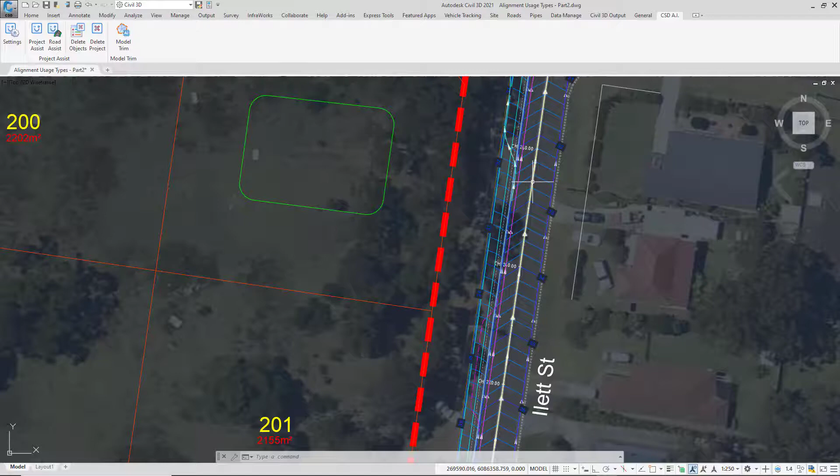So in part one, we used Project Assist to help us build the framework of Ilett Street. This was to create a road string for the main road, followed by road edge connection or string controls for the left edge and the right edge, and then an additional saw cut control. In this particular video, we're going to be creating road 1.

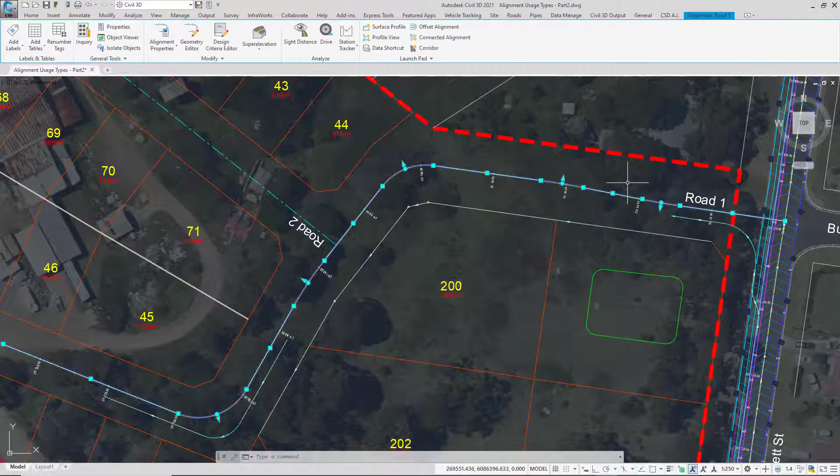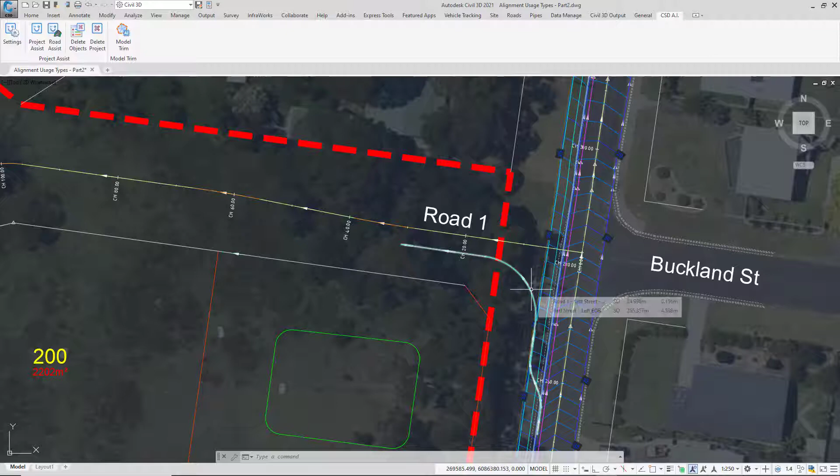And road 1, as you can see, has an alignment which will represent the crown, and the extent of it is shown there. We also have an intersection which will be created for us, and on the south side we have the custom curb return alignment being applied, so we'll be looking at that very shortly.

Further along road 1, we have a small amount of widening on this particular corner, and to assist us with that we have positioned an alignment, so the extent of the 3% crossfall will be projected out onto this particular alignment. Lastly, we've then got an alignment for the boundary. Now we can use this a couple of ways, but we can either have a boundary code applied on this alignment, or we can restrict the batter of our design to this particular alignment. So we'll have a look at that.

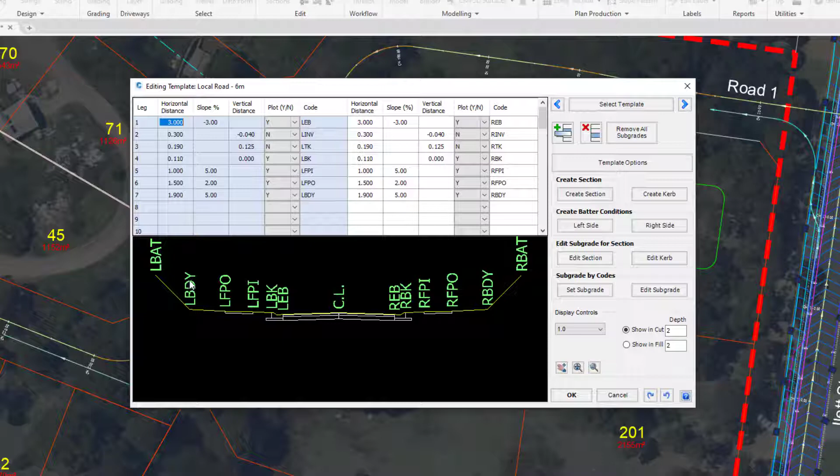Before we do that, let's have a look at the template. So this is the template that's going to be applied. Fairly straightforward. The boundary code, the BDY code, is actually applied in the settings, so the software will look for the BDY code and utilize that in association with the alignment that we have positioned in the drawing. Let's run Project Assist.

So the AI goes through and has a look at the alignment naming, and then tries to determine what each alignment usage type should be. So yes, road 1 is going to become a road string. It's also very important because two road strings, when they connect, will form an intersection. So really road 1 can only ever be a road string. The road 1 batter extents alignment that we reviewed earlier is going to have a boundary line type assigned to it. So this means, as you'll see very shortly, we can determine a couple of things with that.

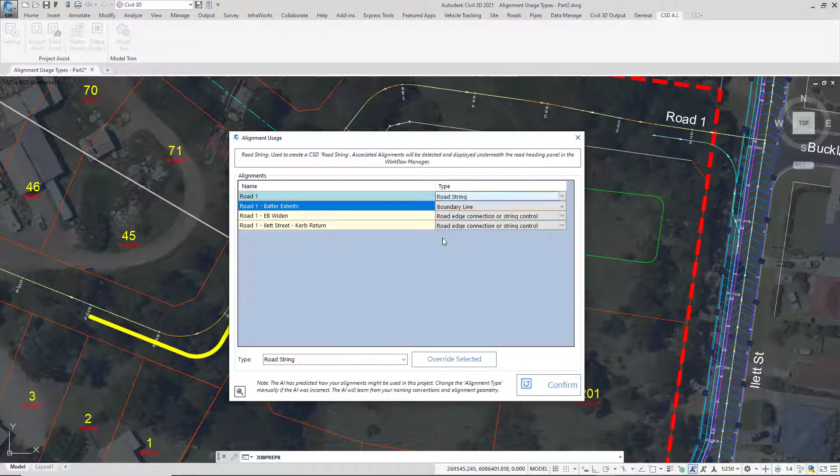If you're creating any kind of widening or edge control, then by default you would always pick road edge connection or string control. If your alignment represents a network string, i.e. a curb return or a cul-de-sac, you will always pick road edge connection or string control, because it's actually doing two things. It's controlling the edge of bitumen, but it's also becoming its own string control in its own right. Let's click on confirm.

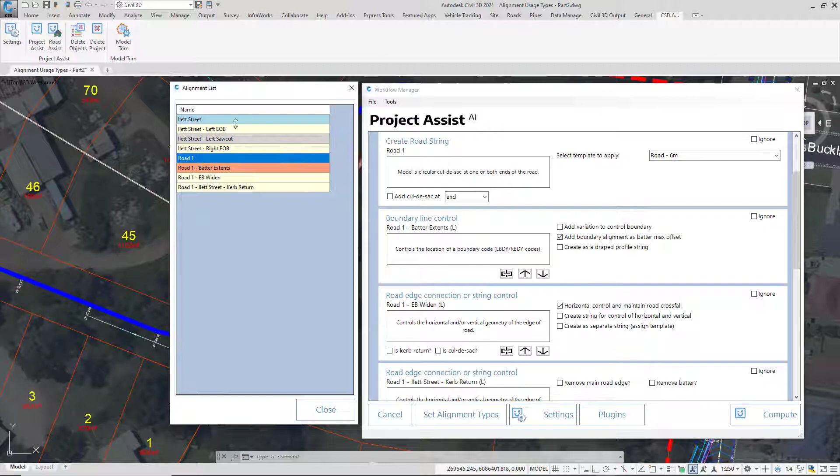So just a tip for you, if you have a lot of alignments in your project and you don't want to be scrolling through the form all of the time, you can go to the tools pull down and click on alignment list. This is just a neat way of being able to see any alignments in the project within the workflow manager. The ones that we're interested in are just these 4 here, but if I click on any particular one of the cells, we get jumped down to that area within the form. So if you've got a lot of alignments, this can be a nice way of managing that list whilst you're in the workflow manager.

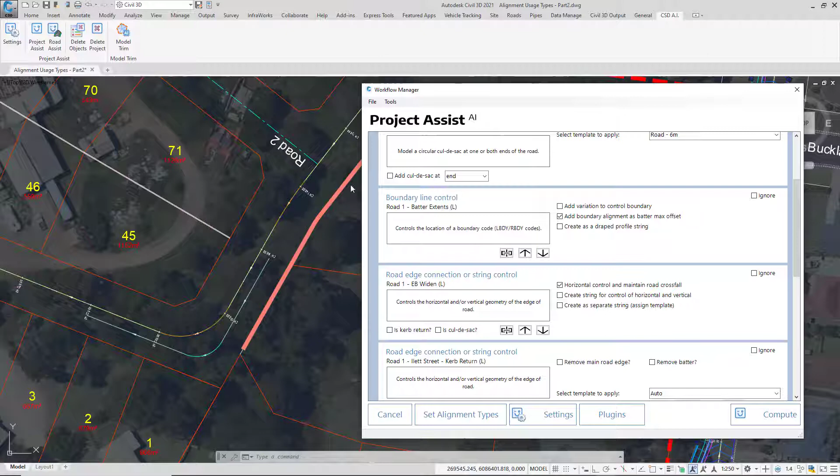So road 1 will become a road string, and we're going to apply our road 6 meter template. The boundary line control is basically this alignment, and we're saying, look, add a boundary alignment as a max batter offset, which means that the batter will be applied to our template but will be restricted by this particular alignment, meaning that we may have varying slopes on the batter.

Further down, we've got the road edge connection or string control for the EB widen, and all we want to happen here is for the edge of bitumen to be positioned onto that alignment. We don't want to adjust the elevations in any way manually, which would be the one underneath, so we're going to use the horizontal control. Lastly, we've got the curb return. So let's have a quick look over here.

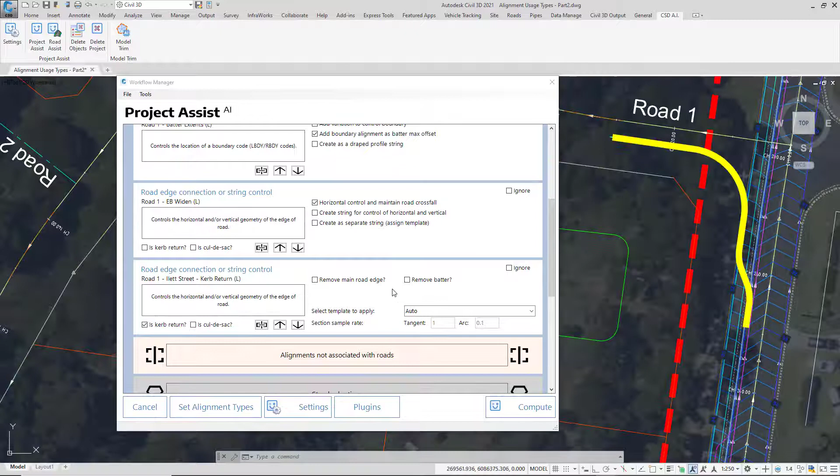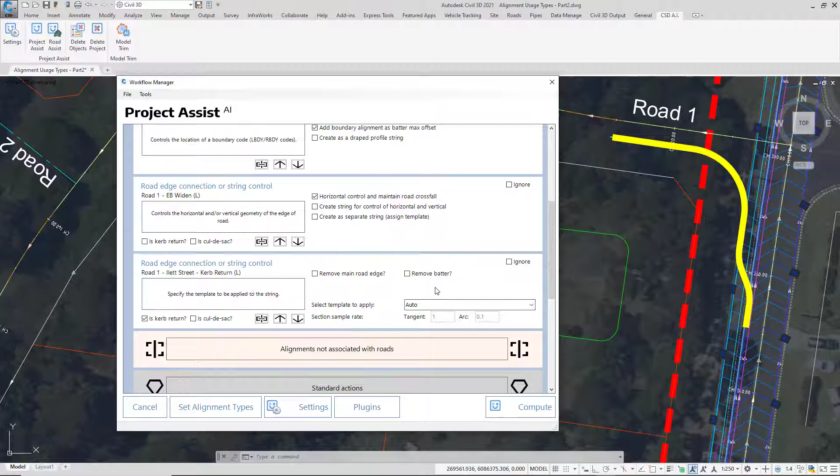So there's a few things you can actually do with the curb return. The first thing you should make sure that you do is always check this button. And if you're finding that it's not associated with your particular road, such as in this case road 1, you can click on this button to disassociate and reassociate to road 1. It's important that it's associated to the side road. We'll discuss these other options a little bit later on, but for the time being we're just going to use the auto template.

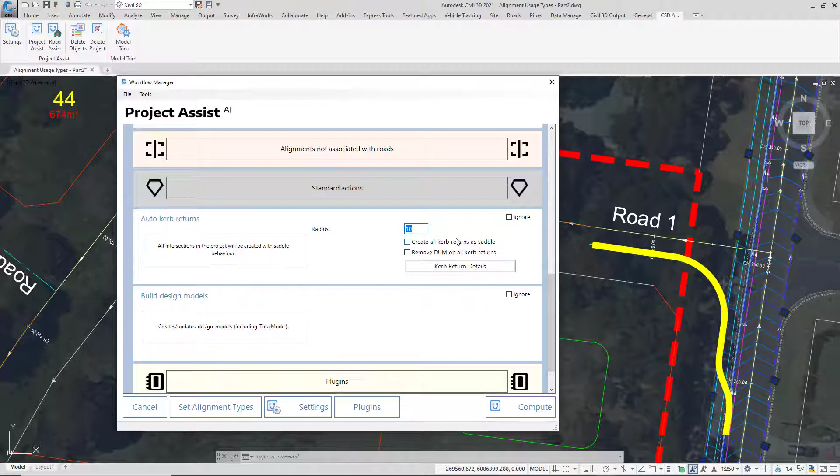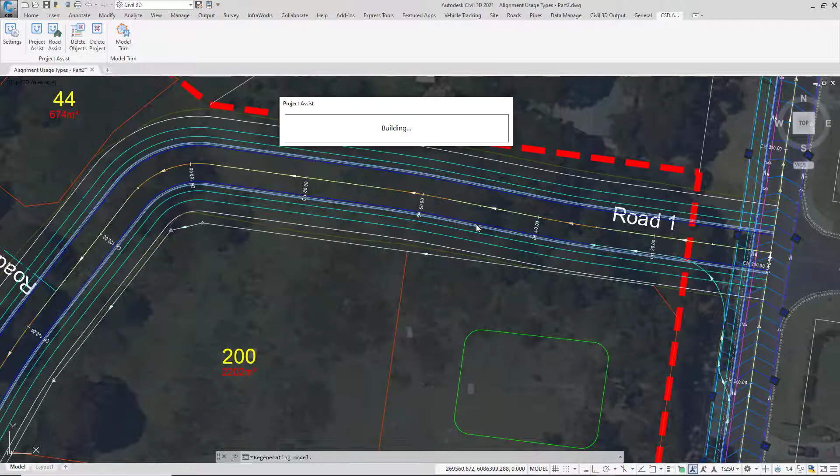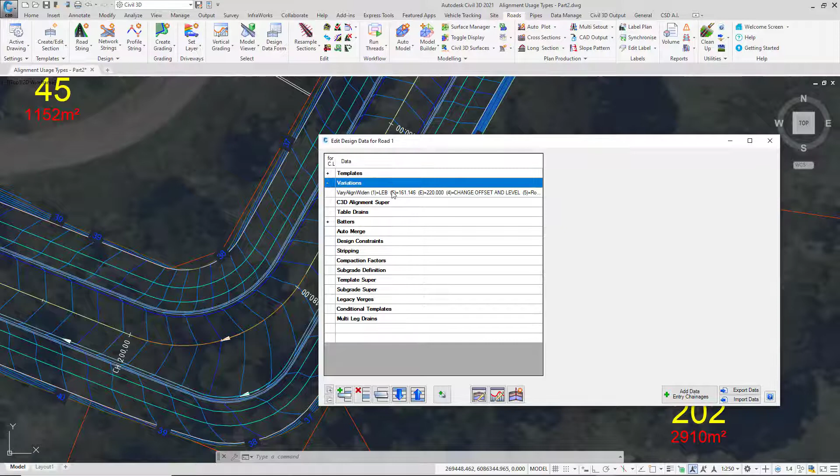So as you can see, the kerb returns have both been formed, 10 meters on the north side, and then the custom has been used on the south side. We have also got our widening being applied to our road. So this is very simple. This is just a design variation that's being added, telling the software to position the LEB onto the alignment and maintain the crossfall through that area where the alignment exists.

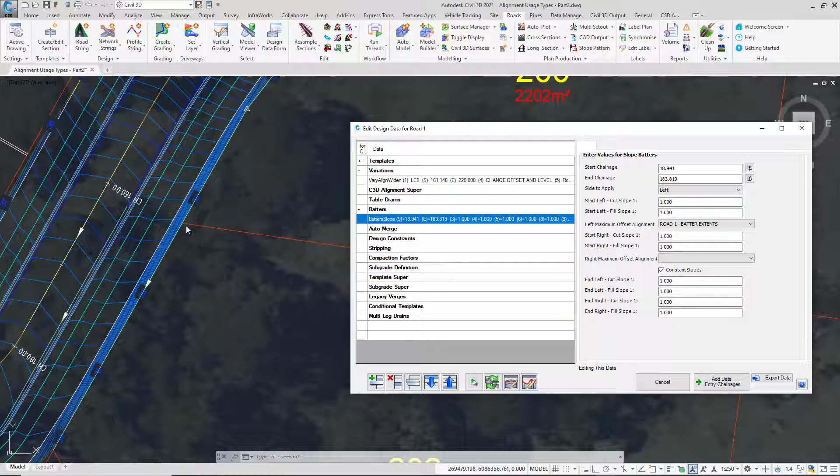And also, in addition, we've got the batter. So by and large, the batter actually maintains its 1-in-1 slope. But as you can see here, due to the vertical design that's being applied, the batter is being restricted on the left-hand side by our alignment. So we're maintaining 1-in-1, but it mustn't go past that particular alignment.

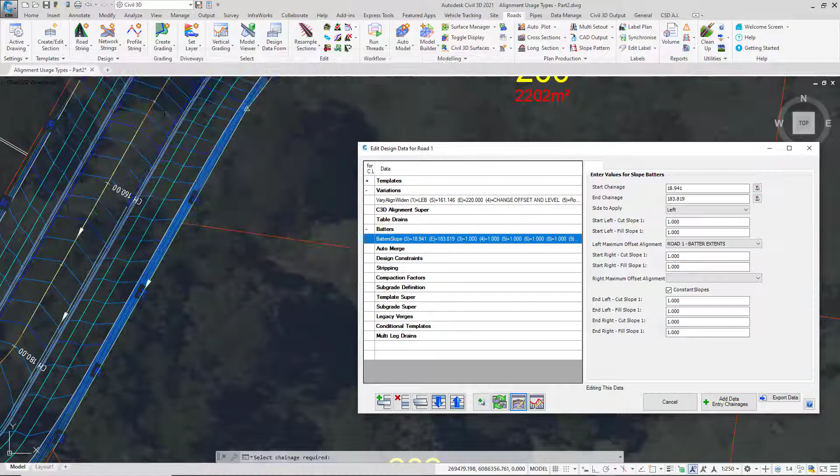And to see this in cross-section, we'll just open up a cross-section window and review a cross-section around about this point. You can see that because the alignment has been added in, that slope has been pulled back to 1-in-0.42. So it's done what we've asked. Now you're in a position to begin designing. The framework has been set out for us, and we can begin to look at the next steps.